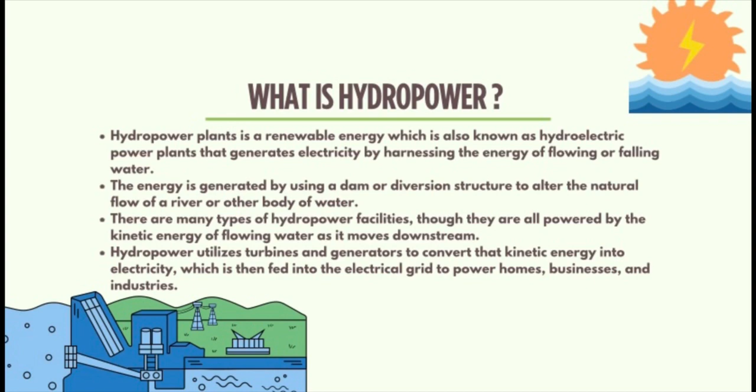Hydropower utilizes turbines and generators to convert the kinetic energy into electricity, which is then fed into the electrical grid to power homes, businesses, and industries. Hydropower harnesses the energy of water moving from higher to lower elevation. It can be generated from reservoirs and rivers. Reservoir hydropower plants rely on stored water in a reservoir, while run-of-river hydropower plants harness energy from the available flow of the river.

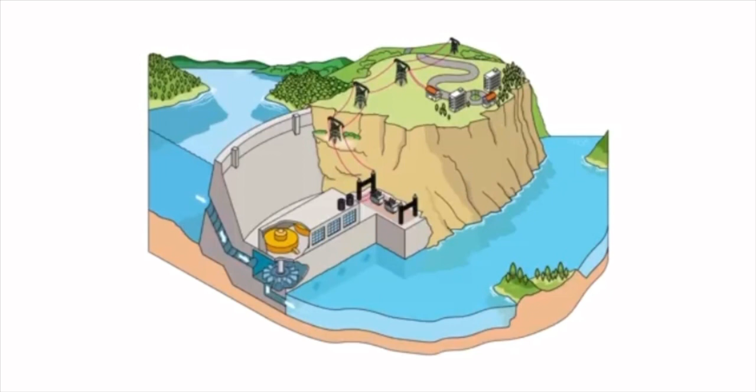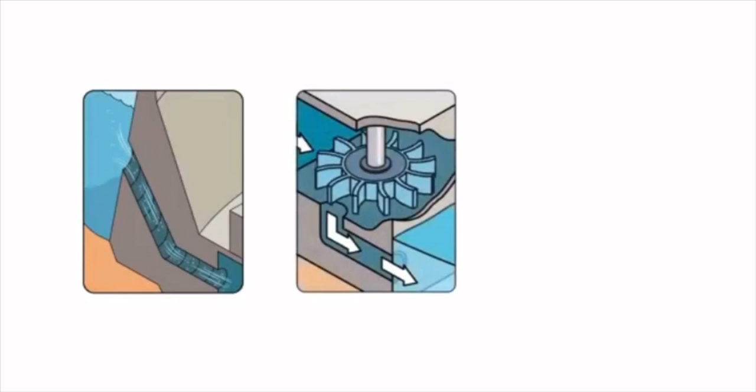Hydropower reservoirs often have multiple uses, providing drinking water, water for irrigation, flood and drought control, navigation service, as well as energy supplies. Hydropower currently is the largest source of renewable energy in the electricity sector.

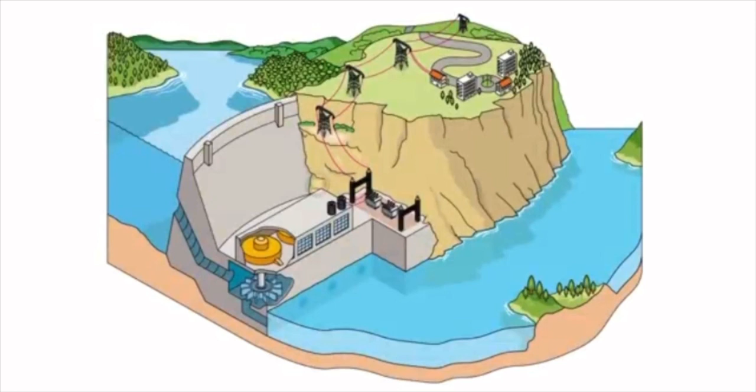It relies on generally stable rainfall patterns and can be negatively impacted by climate-induced droughts or changes to ecosystems which impact rainfall patterns. The infrastructure needed to create hydropower can also impact ecosystems in adverse ways. For this reason, many consider small-scale hydro a more environmentally friendly option and especially suitable for communities in remote locations.

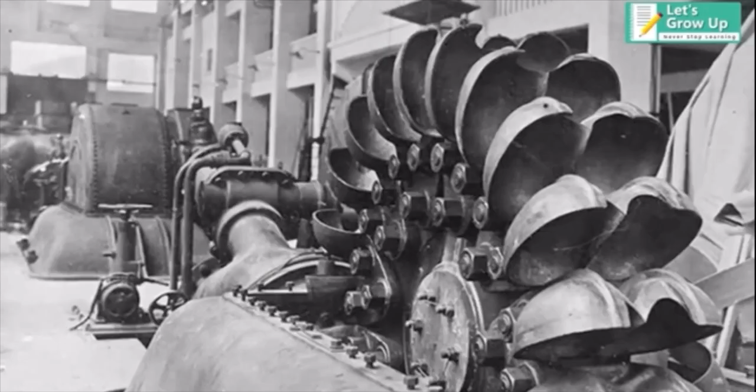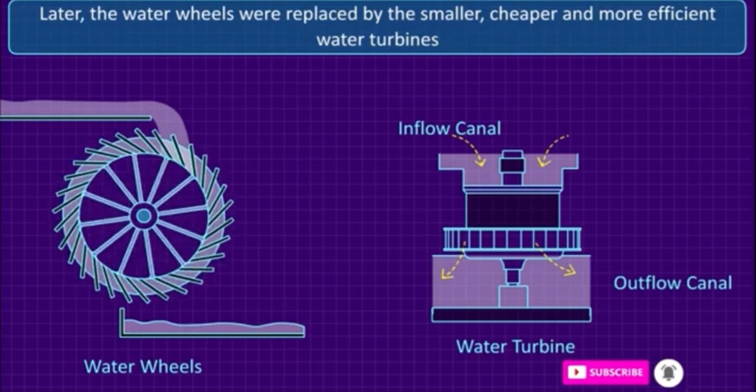The history of hydropower dates back thousands of years. For example, the Greeks used water wheels to grind wheat into flour more than 2,000 years ago. The evolution of the modern hydropower turbine began in the mid-1700s when a French hydraulic and military engineer Bernard Forest de Belidor wrote Architecture Hydraulique.

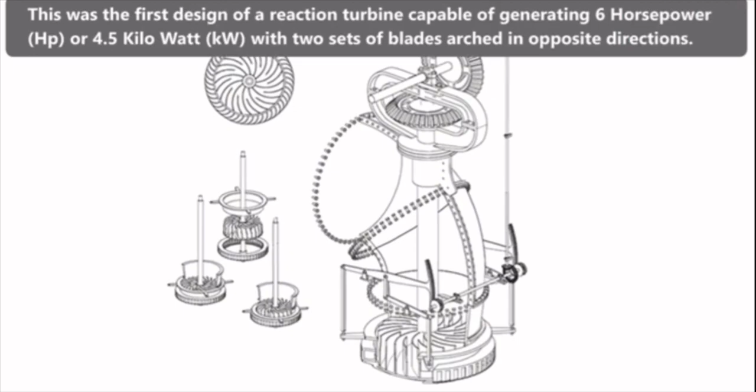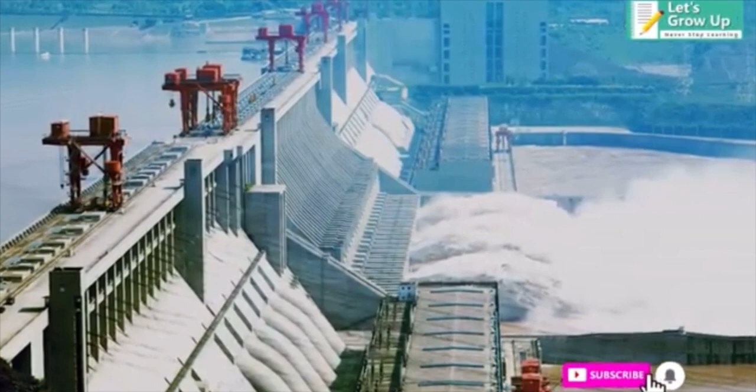Many key developments in hydropower technology occurred during the first half of the 19th century, and most recently, the past century has seen a number of hydroelectric advancements that have helped hydropower become an integral part of the renewable energy mix in the United States.

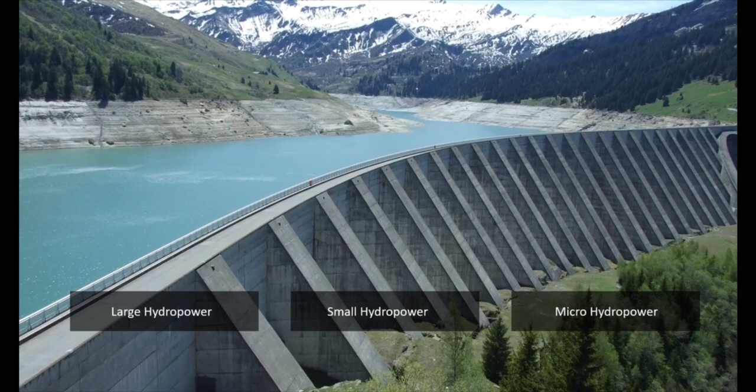Hydroelectric power plant size. Hydropower facilities come in a variety of sizes, from large power plants that serve a large number of users to small, even micro plants run by private citizens for their own energy needs or to sell to utilities. Large hydropower. Large hydropower plants are facilities that have a capacity of more than 30 megawatts (MW).

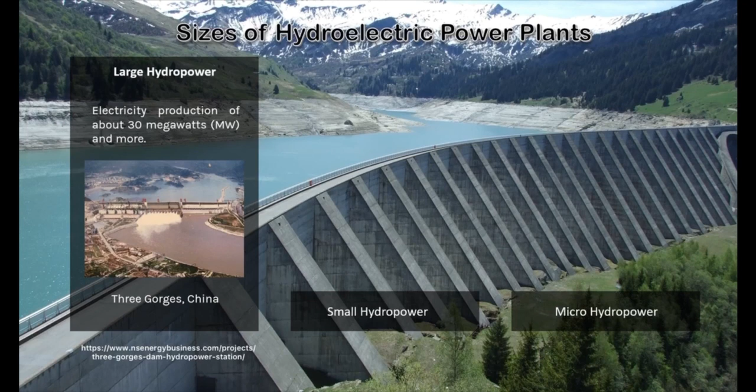Small hydropower. Small hydropower plants are projects that generate electricity between 100 kilowatts and 10 megawatts. Micro hydropower. A micro hydropower plant has a capacity of up to 10 kilowatts. A small or micro hydroelectric power system can produce enough electricity for a single home, farm, ranch, or village.

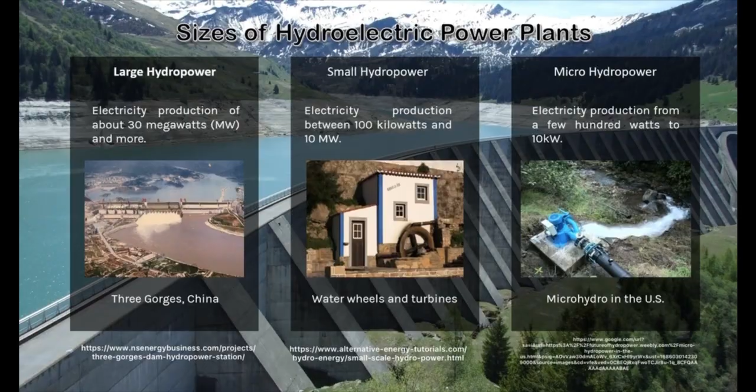Hydropower plants are characterized by several key features and components that enable them to generate electricity from the energy of moving water. Here are the main characterizations of a hydropower plant. First, we start with the dam. A hydropower plant typically includes a dam, which is a structure built across a river or a water reservoir. The dam creates a large reservoir by impounding water, allowing for a controlled flow and accumulation of water.

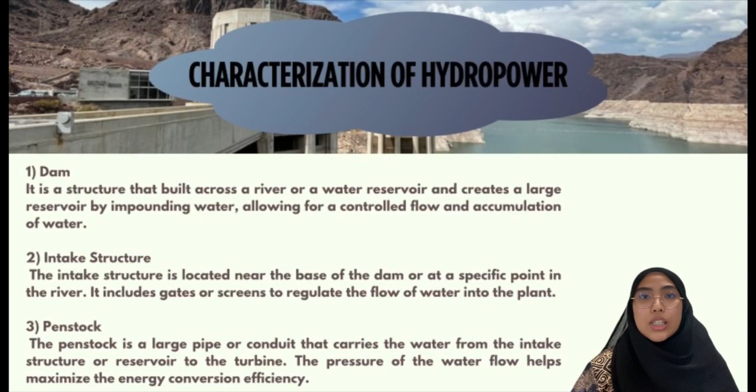Next, intake structure. The intake structure is located near the base of the dam or at a specific point in the river. It includes gates or screens to regulate the flow of water into the plant. Next, penstock. The penstock is a large pipe or conduit that carries the water from the intake structure or reservoir to the turbine. The pressure of the water flow helps maximize the energy conversion efficiency.

Next, turbine. The turbine is the primary component responsible for converting the energy of moving water into mechanical energy. It is typically located within a powerhouse and its blades are turned by the force of water flowing through it.

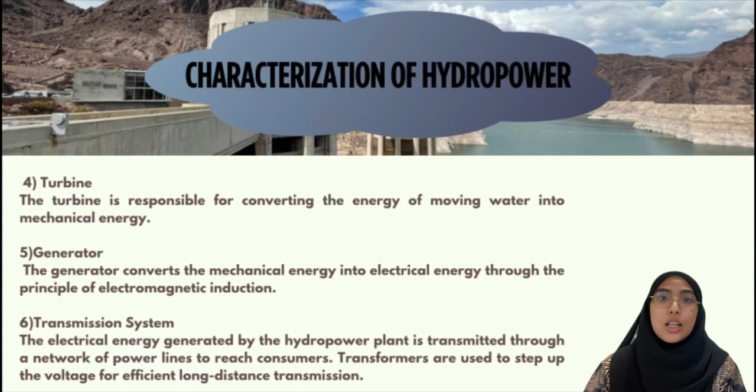Moving on to generator, the mechanical energy produced by the turbine is then used to drive a generator. The generator converts the mechanical energy into electrical energy through the principle of electromagnetic induction. Next, transmission system. The electrical energy generated by the hydropower plant is transmitted through a network of power lines to reach consumers. Transformers are used to step up the voltage for efficient long-distance transmission.

Next, tailrace. After passing through the turbine, the water is discharged from the plant into a tailrace, which is a canal or a river downstream. This ensures the continuity of the water flow and minimizes environmental impact. After that, control system. Hydropower plants have a sophisticated control system to regulate and monitor various parameters such as water flow, turbine speed, voltage, and frequency. This system ensures safe and efficient operation of the plant.

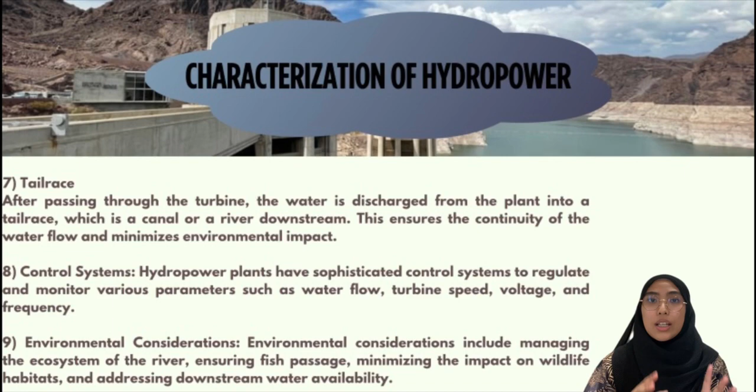Next, environmental consideration. Hydropower plants have varying environmental impacts depending on their size and location. Environmental considerations include managing the ecosystem of the river, ensuring fish passage, minimizing the impact on wildlife habitats, and addressing downstream water availability.

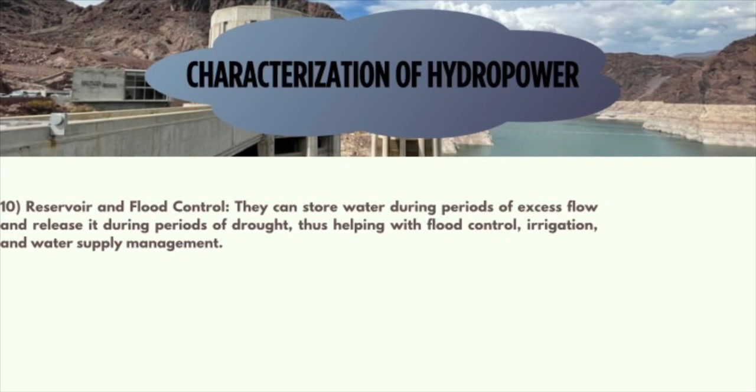Next, reservoir and flood control. Hydropower plants with reservoirs provide benefits beyond electricity generation. They can store water during periods of excess flow and release it during periods of drought, thus helping with flood control, irrigation, and water supply management. These are some of the key characteristics of a hydropower plant. Each plant can differ in design and scale, but the underlying principle remains constant in harnessing the power of water to generate clean and renewable energy.

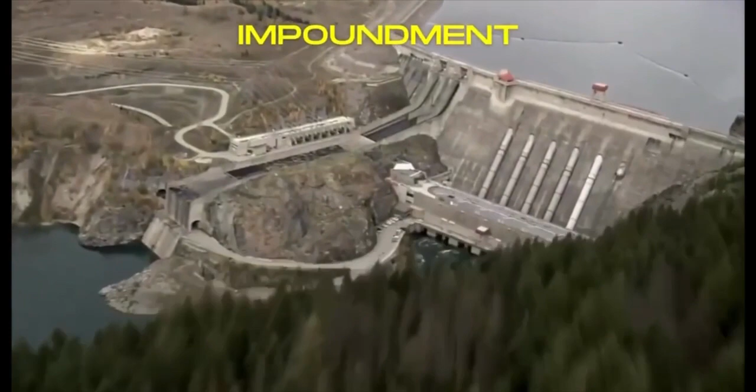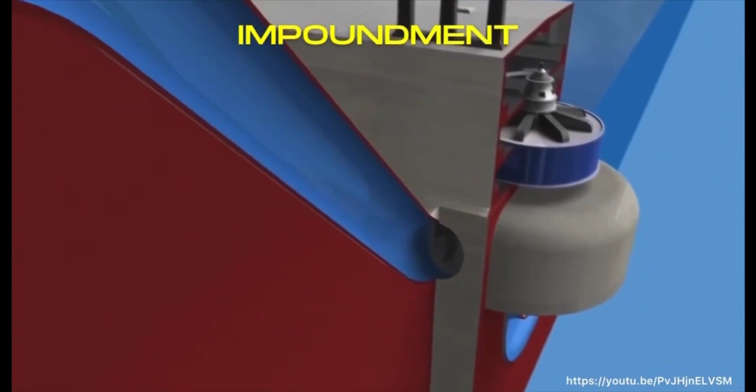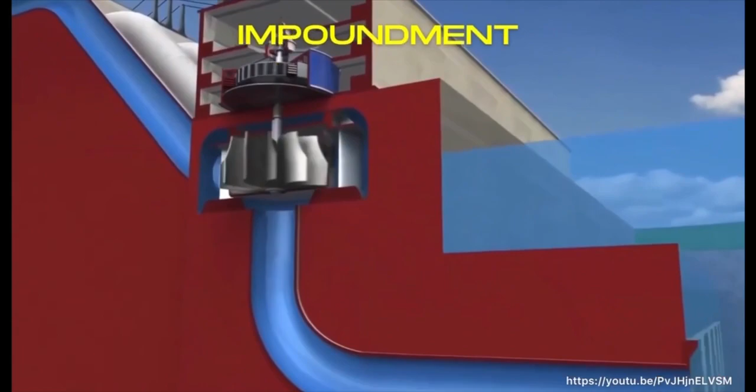Let's proceed to the next section, hydropower classifications. The first one is the impoundment. The impoundment is a hydropower facility that utilizes a dam as a reservoir to store river water. Water is released from the reservoir and flows through a turbine, spinning it, which activates the generator to produce electricity. This type of hydropower system is able to meet both the base load and peak load demands, as the water can be released anytime from the reservoir to meet changing electricity needs.

The next type is the diversion. A diversion or run-of-river is a hydropower that does not require the use of a dam. It makes use of the natural decline of the riverbed to produce electricity. Since there is no dam, there is limited to no storage reservoir to store river water. Because of that, the run-of-river system is mainly useful for baseload capacity depending on the changes in river flow.

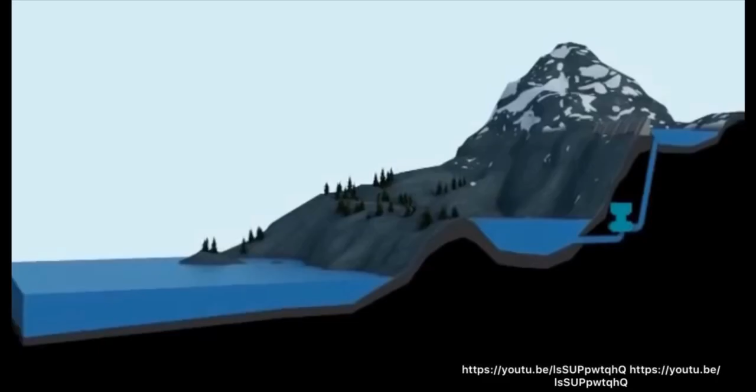Another type is the pumped storage hydropower, or PSH. A PSH is a type of hydropower that works like a giant battery. In a PSH, water that is used to spin the turbine can be reused by pumping the water back to its initial reservoir. During high electricity demand, the water is released to the lower reservoir, and during low electricity demand, the water is pumped back from the lower reservoir to the upper reservoir for later use.

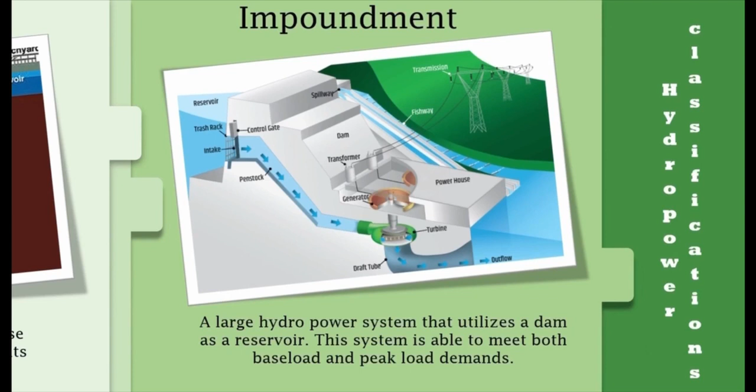In 2021, hydropower generation decreased by 0.4% despite a step increase in capacity growth. The decrease was caused by droughts in several parts of the world. Nevertheless, hydro remains the largest renewable source of electricity, generating more than all other renewable technologies combined.

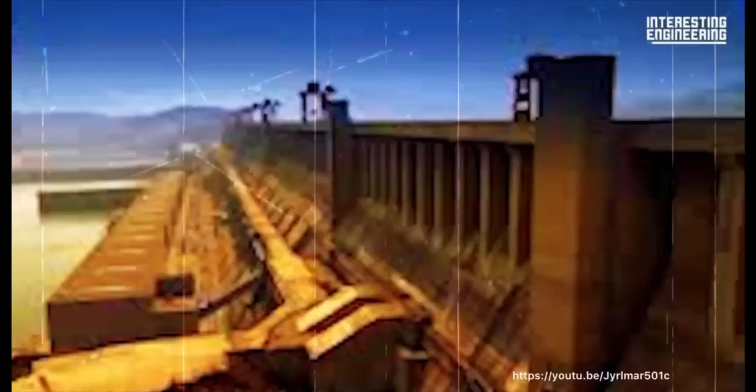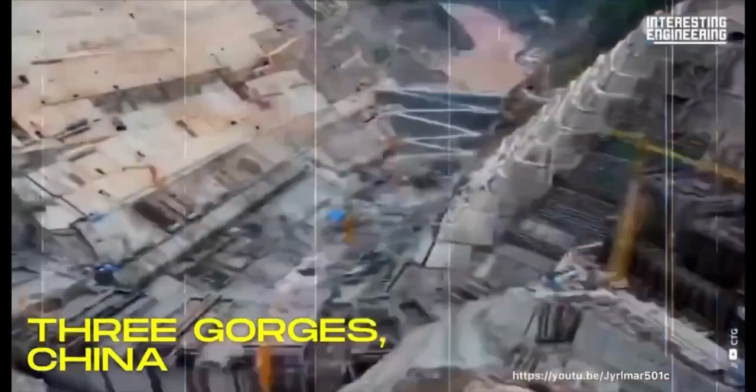Today, the 22.5 gigawatt Three Gorges hydroelectric power plant in Yichang, Hubei province, China, is the world's biggest hydropower station. It is a conventional impoundment hydropower facility exploiting the water resource of the Yangtze River. The project is owned and operated by China Three Gorges Corporation, or CTGC, through its subsidiary China Yangtze Power.

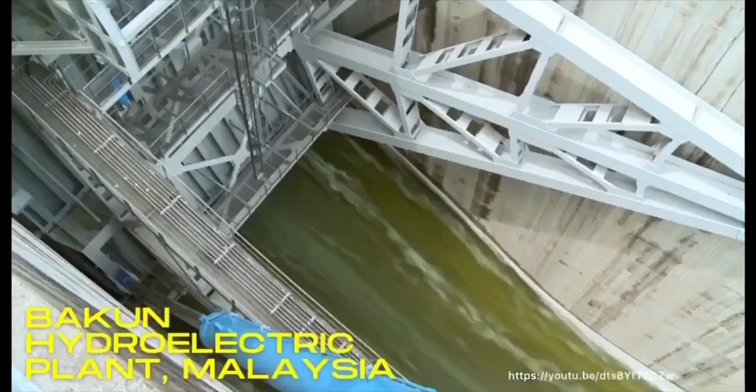In our country Malaysia, located in the state of Sarawak in Malaysian Borneo, the Bakun hydroelectric plant is the largest in the country with an installed capacity of 2,400 MW. Owned and operated by Sarawak Energy since 2017, the Bakun power plant began generating electricity in 2011 and contributes to the Sarawak Corridor of Renewable Energy, or SCORE, which aims to transform Sarawak into an advanced industrialized state by the year 2030.

Next, properties. The properties of a hydropower plant refer to the characteristics and attributes that define its operation and performance. Here are the main properties of a hydropower plant. Firstly, capacity. The capacity of a hydropower plant refers to the maximum amount of electrical power it can generate. It is typically measured in megawatts and depends on factors such as the size of the turbine, water flow rate, and height of the water drop.

Second, efficiency. Efficiency is a crucial property of a hydropower plant and indicates how effectively it can convert the energy of moving water into electrical energy. Higher efficiency means a greater percentage of the available energy is converted. Hydropower plants generally have high efficiency, often exceeding 90%.

Third, reliability. Hydropower plants are known for their high reliability as they can operate continuously, providing a stable and consistent source of electricity. They are not affected by factors like fuel availability or weather conditions, which can impact other renewable energy sources.

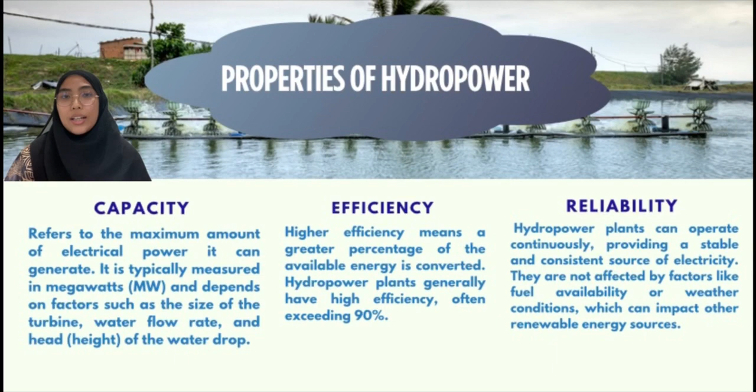Fourth, flexibility. Hydropower plants offer a high degree of flexibility in operation. They can respond quickly to changes in demand, providing power on demand by adjusting the flow of water through the turbines. This flexibility is beneficial for maintaining grid stability and meeting peak demand periods.

Fifth, longevity. Hydropower plants are designed to have a long operational lifespan, often exceeding 50 years. The main components such as dam, turbines, and generators are built to withstand the test of time with proper maintenance and periodic upgrades.

Sixth, energy storage. Hydropower plants with reservoirs provide a form of energy storage. Excess electricity generated during low demand periods can be used to pump water from a lower reservoir to a higher one. This stored water can be released later to generate electricity during peak demand, acting as a form of energy storage.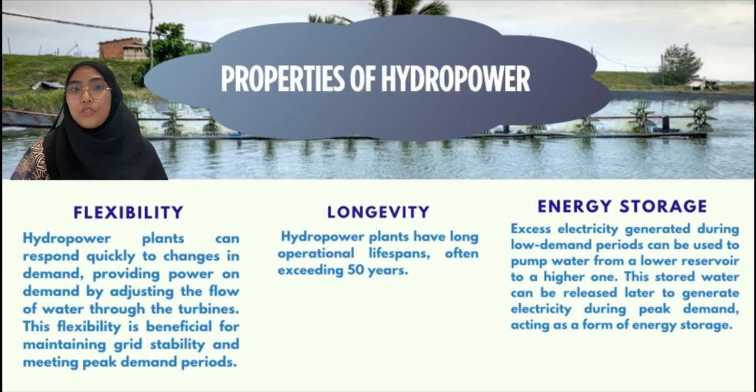Seventh, environmental impact. The environmental impact of a hydropower plant depends on factors such as its size, location, and design. While hydropower is a renewable energy source, the construction of large dams can lead to ecological changes affecting fish, habitats, river ecosystem, and local communities. Careful consideration and mitigation measures are important to minimize environmental impacts.

Eighth, cost effectiveness. Hydropower plants can provide a cost-effective source of electricity in areas with suitable water resources. Once the infrastructure is in place, the operational costs of hydropower plants are relatively low compared to fossil fuel power plants.

Ninth, grid integration. Hydropower plants can be seamlessly integrated into existing power grids. They can provide baseload power, which is the minimum level of electricity needed to meet constant demand, and also serve as a reliable backup during power outages or periods of high demand. These properties make hydropower plants a valuable and versatile source of clean and renewable energy, contributing to energy sustainability and reducing greenhouse gas emissions.

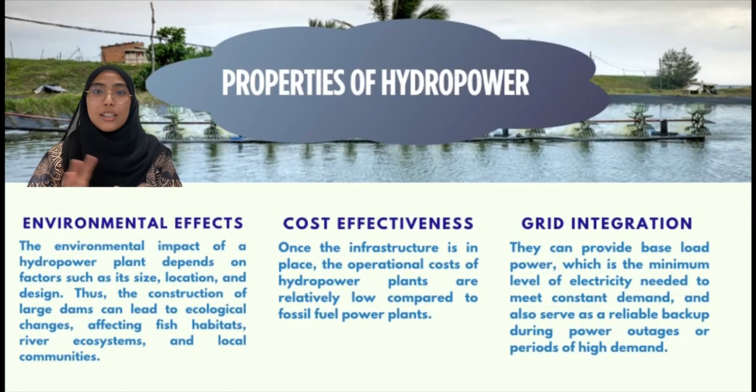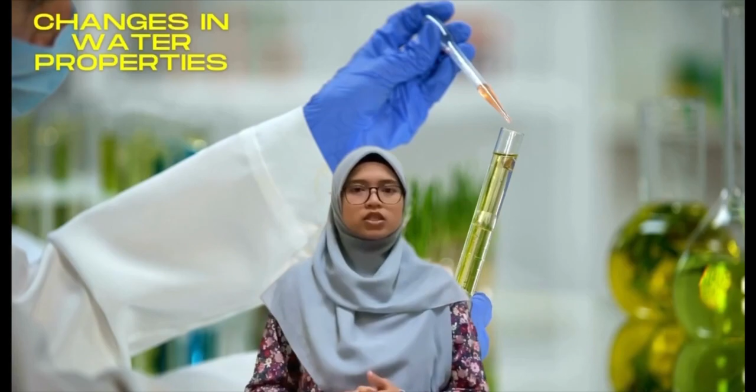Despite being non-polluting, hydropower systems do have environmental impacts, especially from the construction of the dam and the reservoir, plus the operation of the hydroelectricity generators. A dam that creates a reservoir may obstruct fish migration. The dam can also change natural water properties such as temperatures and water chemistry, river flow characteristics, and silt loads. All of these changes can affect the ecology and the physical characteristics of the river.

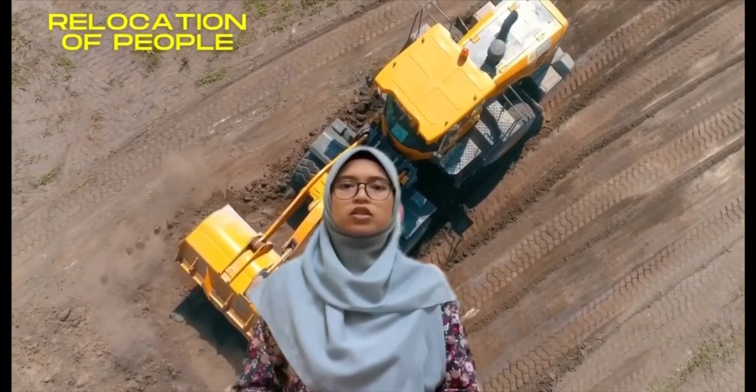These changes may have negative effects on native plants and on animals in and around the river. Reservoirs may cover important natural areas, agricultural land, or archaeological sites. A reservoir and the operation of the dam may also result in the relocation of people.

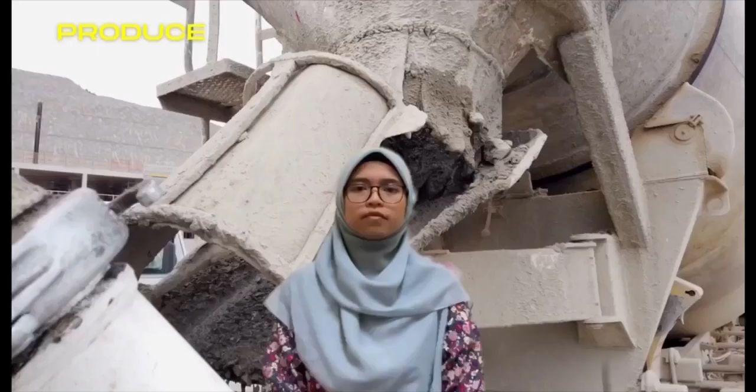Greenhouse gases such as carbon dioxide and methane form in natural aquatic systems and in human-made water storage reservoirs as a result of the aerobic and anaerobic decomposition of biomass in the water. Manufacturing the concrete and steel in hydropower dams requires equipment that may produce emissions. However, given the long operating lifetime of a hydropower plant, from 50 years to 100 years, these emissions are offset by the emissions-free hydroelectricity.

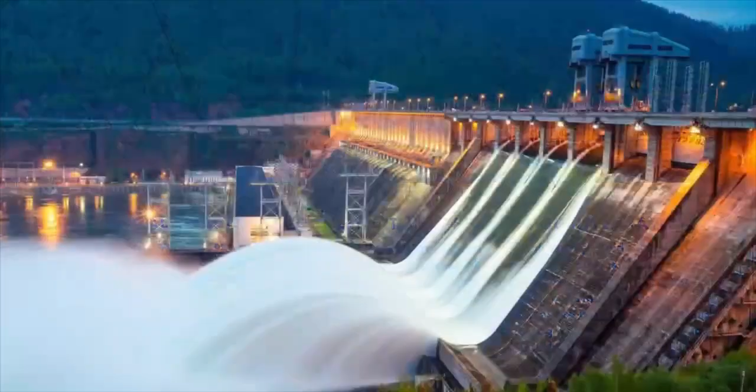The hydro system, which uses water to produce electricity, is a good example of the function that water plays in society. The system's operability can only be seen or understood in terms of the availability of water resources. The electricity produced by this system will be used to power a range of electrical appliances, enabling people to live better and more comfortably.